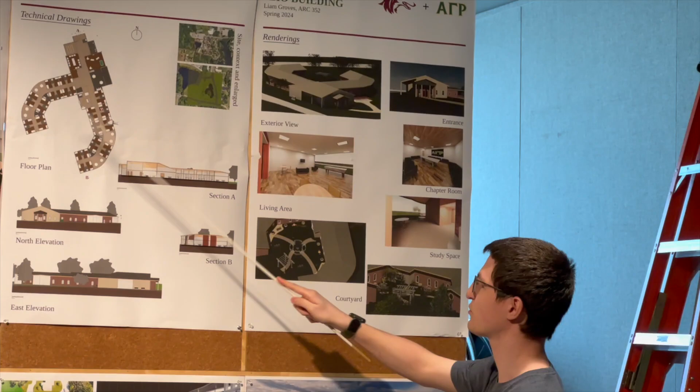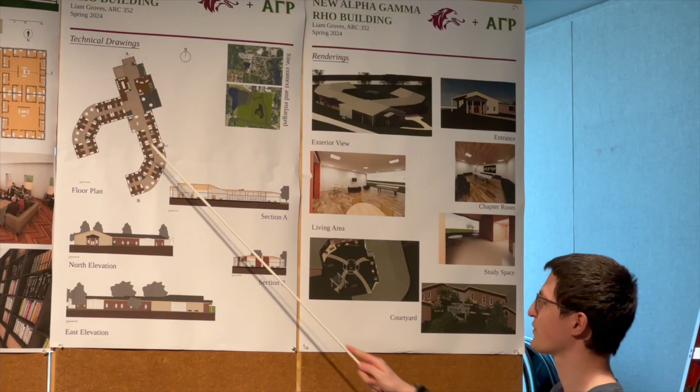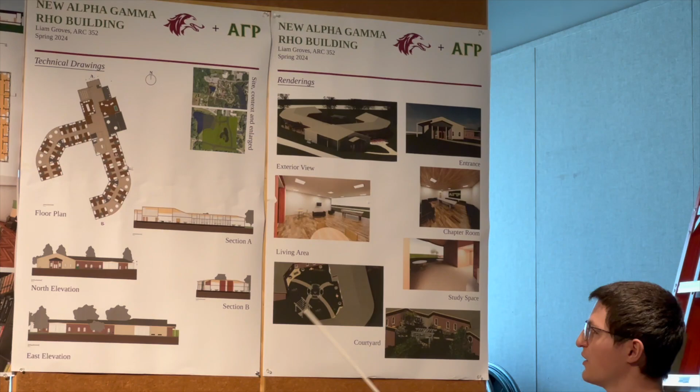I curved them, and I found that this created a great opportunity for the courtyard, which I'll get to later. Down the hallways, there are 4 study spaces, all with curtain walls to provide lots of natural light. I didn't want to just wall it off with a normal brick wall and a window like I did for most of the other spaces. I wanted it to be open, inviting, and collaborative.

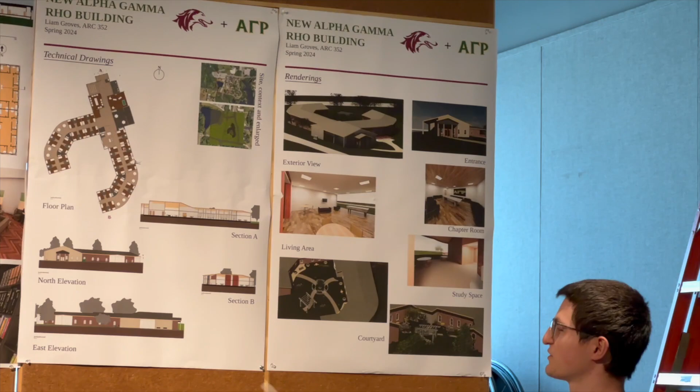There are also more laundry units in little pockets, so students don't have to walk all the way down. I lived in the towers my freshman year and was lucky to be close to the laundry unit, but it can still be a hassle to carry a big basket of laundry a long distance.

There are also doors at the ends of the wings, so students can easily access the courtyard, or just to give more exit opportunities so no one has to take the long trek back to the single entrance.

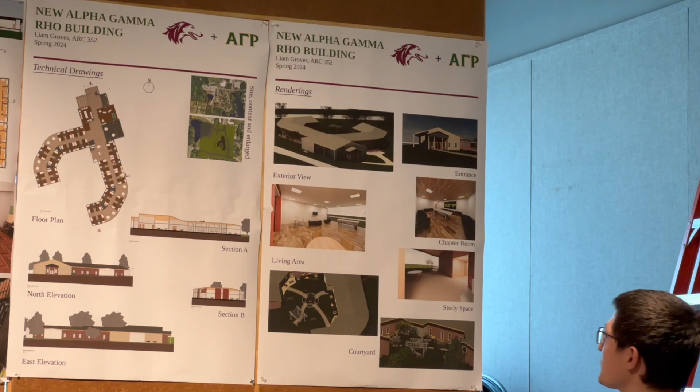Moving on to the renders, I'd like to talk about the courtyard, since this was a big goal with my design. I wanted to create an open, inviting courtyard that stood out from a lot of things on campus—a peaceful space where students can relax, study, and enjoy nature, because I love being outdoors and wanted to bring that into this design.

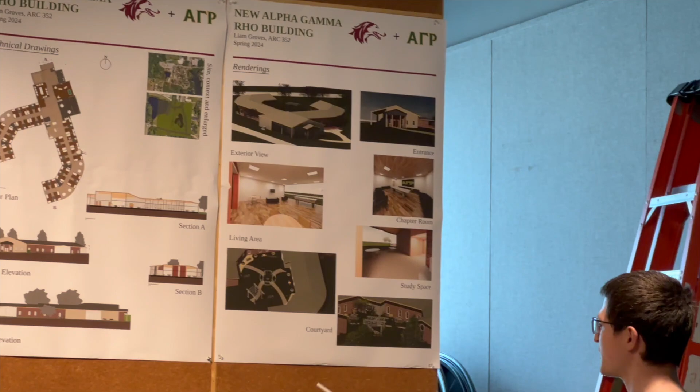There's a big pergola that creates a grand entrance with trees framing it. It's dark and hard to see, but there are 4 little pathways leading to seating areas with more flagstone and some benches.

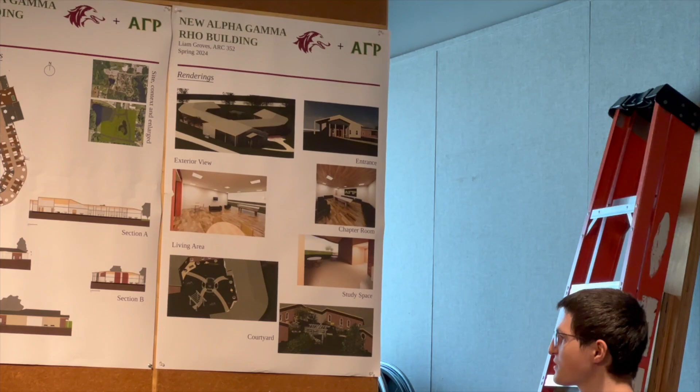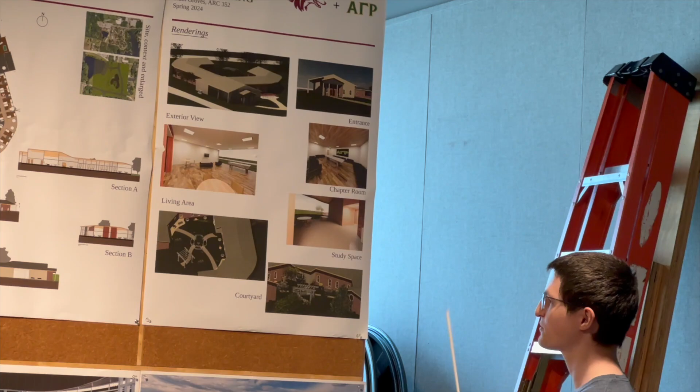Throughout the courtyard there are various shrubs inside planters. In the center there's a spruce tree, with the area dug out and surrounded by water, which I thought would liven up the courtyard a little.

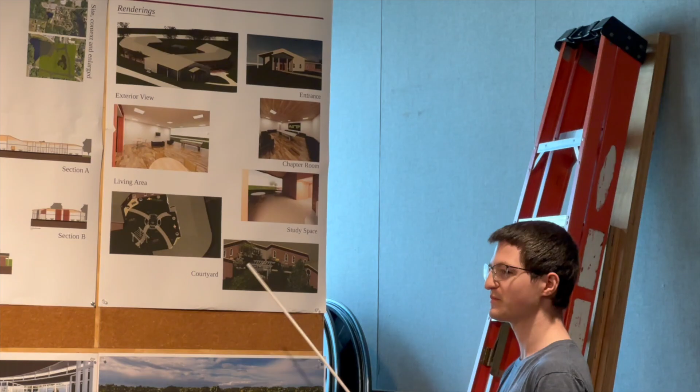I gated it off because I wasn't too sure—partly for safety, since I don't want anyone falling into the water, which is about 4 feet deep. But I also know college students can get a little crazy; maybe someone's out there with a beer dumping it in the water. I didn't want anything bad to happen, so hopefully people would just use the space to enjoy it and not tamper with it.

Bottom line, I wanted it to be a quiet space with plenty of plants, not only for people to enjoy, but also for local wildlife.

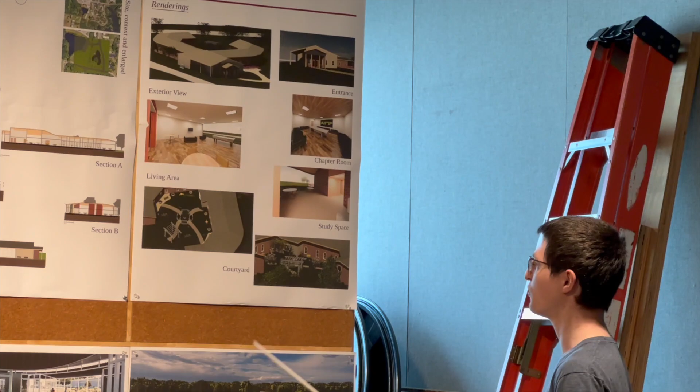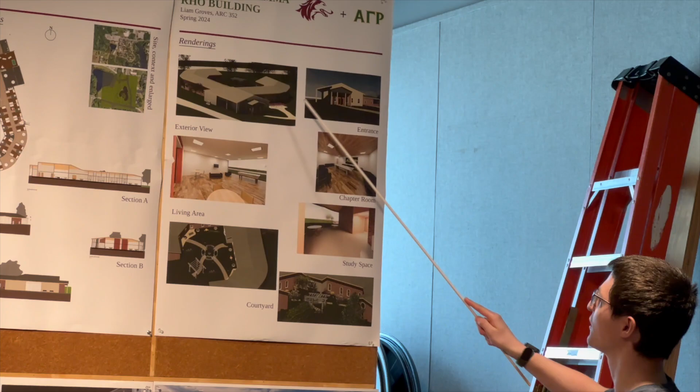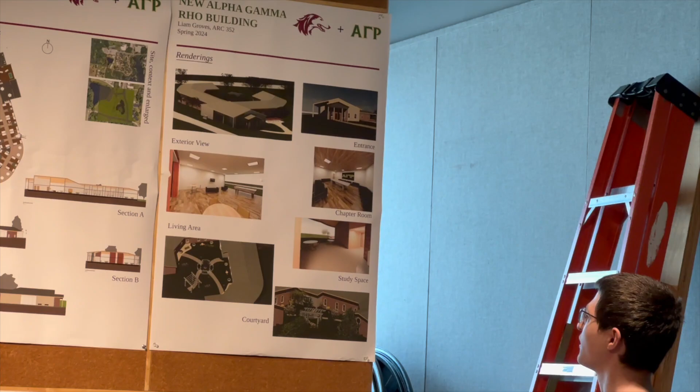That's it for the renders. There's an overall shot of the building—you can see the bike rack up at the front. This is a shot of the main entrance with some columns on it to create more of a classical look. Here's the chapter room with a table in the center and lots of chairs around, and then the study space mentioned earlier.

So that's all I have. Any questions or comments? You're not the only one that's put a bike rack in it.

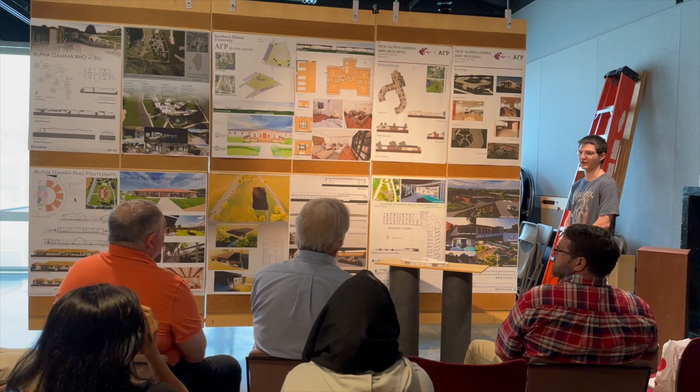I like the way you always curve that courtyard. Very nice. Thank you, I like the courtyard. Thank you, very relaxing.

I'll commend you for the pool table. Yeah, there you go, I like that. That's cool—I think there's one in every dorm on East Campus, just in the main lobby, so I thought it could be awesome. Believe it or not, we actually do more than just sit there and look at each other. And beer—that's a myth.

Going back to the spruce tree in the courtyard, I like that innovation. Yeah, I did that with the intent that there's obviously a variety of deciduous and evergreen trees, but I wanted the evergreen to be a central focus so there was something to look at throughout the whole year, instead of just having a big oak tree that dies in the winter and becomes barren and empty.

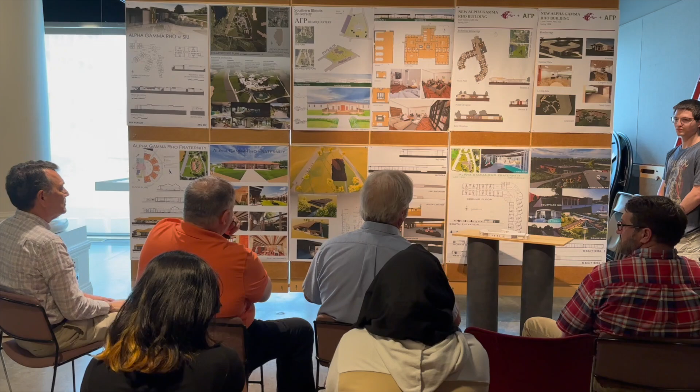Well, I'll say it fits nicely on that corner lot. That will become an issue when housing and foundation decide what these buildings look like exactly, because size is going to come into play, especially on the inner circle, where there are a lot of smaller spaces. This fits in there very nicely. Good, thank you, thank you.